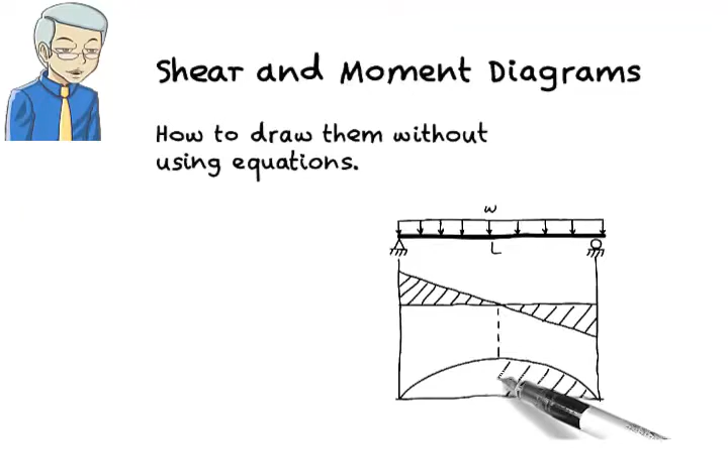Shear and moment diagrams. In this lecture we focus on drawing shear and moment diagrams without the use of any equations. This is particularly useful for practical structural analysis and design. More specifically, we're going to learn how to construct the shear diagram directly from the load diagram, and how to construct the moment diagram from the shear diagram.

Suppose we wish to construct shear and moment diagrams for a simply supported beam subjected to a uniformly distributed load. Observe that the beam has two upward reactions, each having a magnitude of WL over 2.

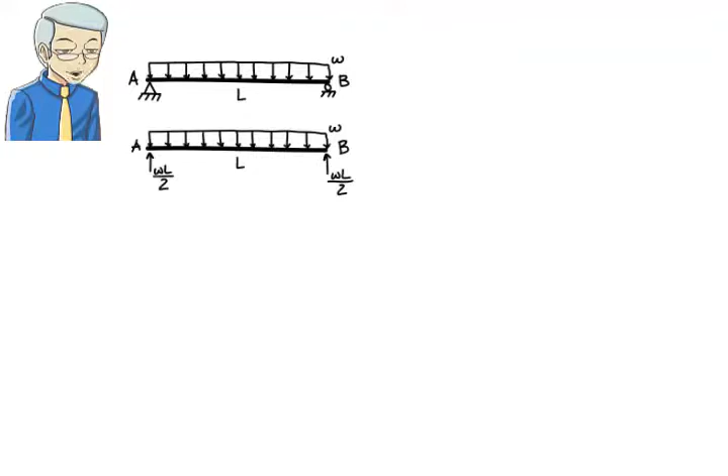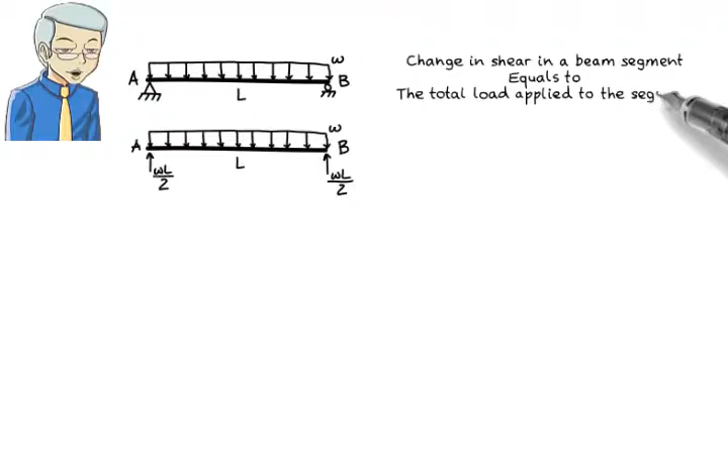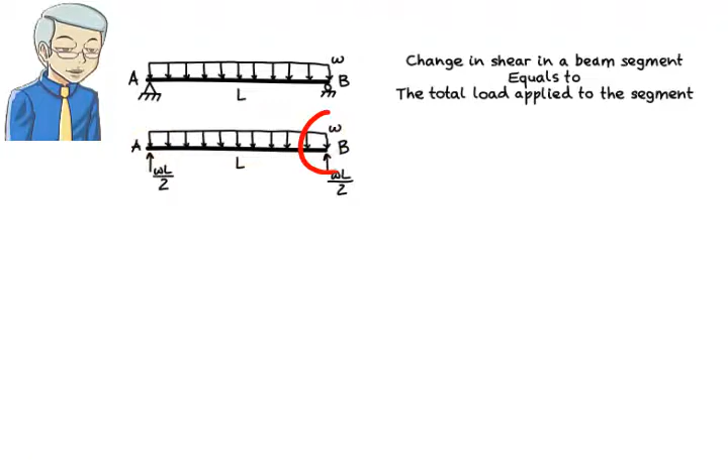The basic fact that enables us to draw the shear diagram directly from the load diagram is this: the change in shear in a beam segment is equal to the total load applied to the segment. So if we know shear at A and we know how much load is being applied to segment AB, then we can easily calculate shear at B. That is, shear at B equals shear at A plus the total load applied to the segment.

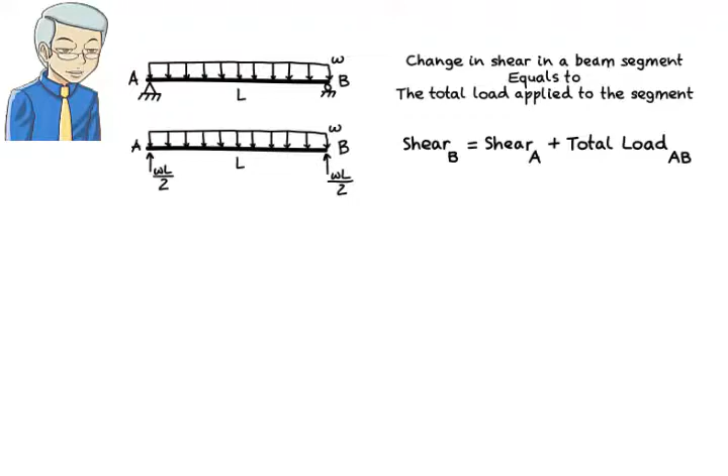The total load applied to the beam segment here is the area of the rectangle having L as its base and W as its height. Therefore, the total load is negative WL. The negative sign indicates that the load is acting downward.

To draw the shear diagram for the beam segment, we need to have three pieces of information: 1. Shear at the left end of the segment. 2. Shear at the right end of the segment, and 3. The shape of the curve that connects the two points.

In the case of a simply supported beam, shear at the left end of the beam always equals the support reaction at that end. Since there is an upward reaction of WL over 2 at the left end of the beam, then shear there is positive WL over 2.

Shear at the right end of the beam segment equals the shear at the left end plus the area under the load diagram between the two points. Therefore, shear at the right end is WL over 2 minus WL, or negative WL over 2.

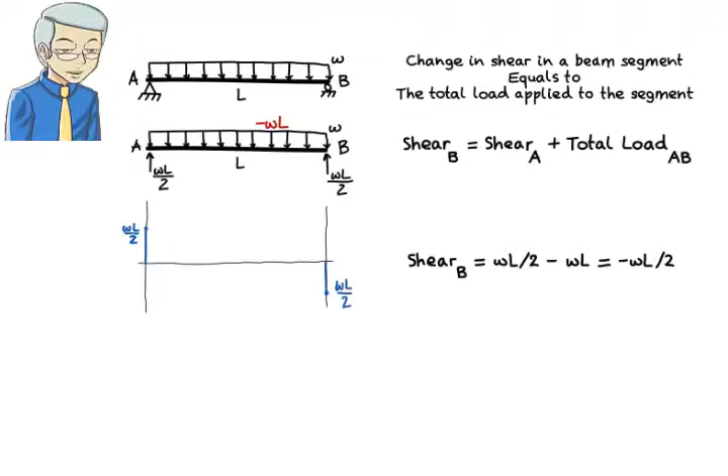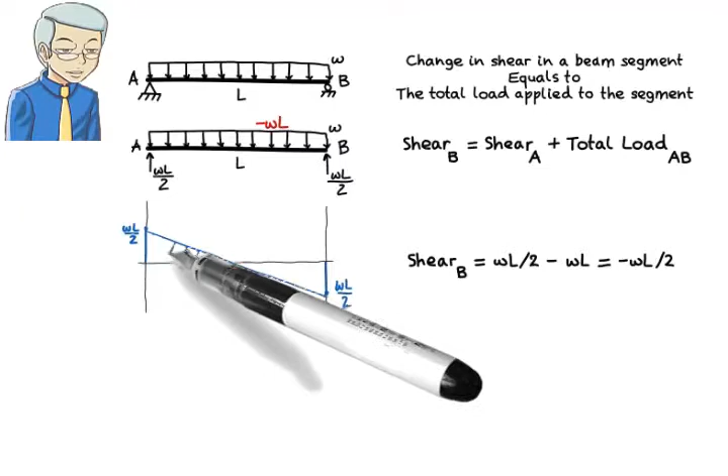Now that we know shear at either end of the segment, we need to draw the curve representing shear within the segment. Since here the load is constant throughout the beam segment, then we draw a straight line connecting the two points. That is, shear is linear in the beam. A beam segment subjected to a uniformly distributed load carries a linearly varying shear.

Concerning the shape of the diagram, the underlying rule is this: if we view the load diagram and the shear diagram as polynomials, then the degree of the shear polynomial is one higher than that of the load polynomial. Since the degree of the load polynomial in this example is 0, the load is constant, then the shear polynomial has a degree of 1. Shear varies linearly in the beam.

Note that the shear diagram consists of a positive region and a negative region, with shear being 0 at the midpoint of the beam. Let's label the positive region R1 and the negative region R2.

We are now in a position to draw the moment diagram using the constructed shear diagram. To do so, we need to calculate the area under the shear diagram. Since the diagram consists of two regions, we need to calculate two areas: a positive area associated with R1 and a negative area associated with R2.

R1 forms a right triangle with a height of WL over 2 and a base of L over 2. Therefore its area is WL squared over 8. R2 has an area equal to WL squared over 8, but this area is negative since the region is below the x-axis. We draw the moment diagram segment by segment.

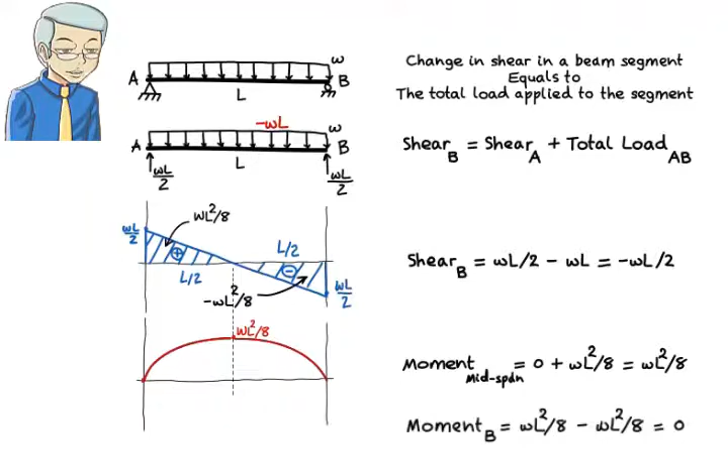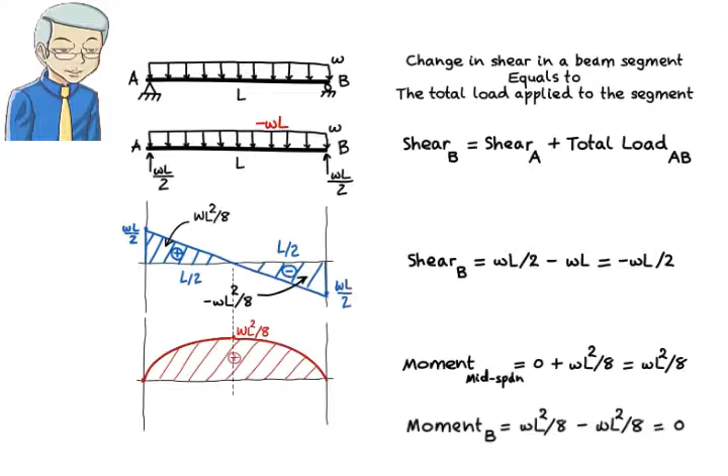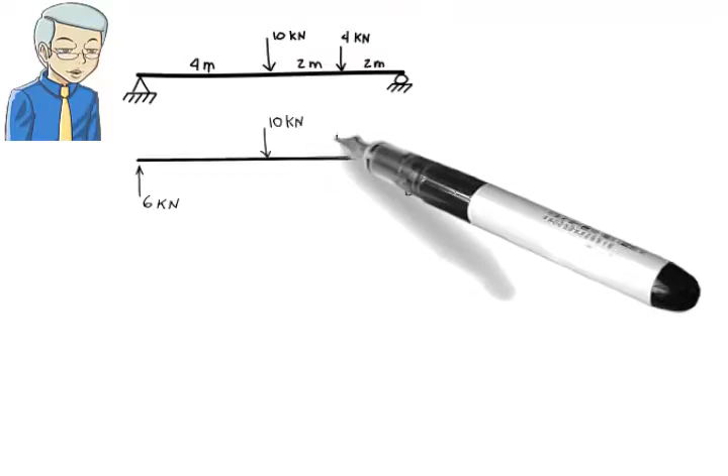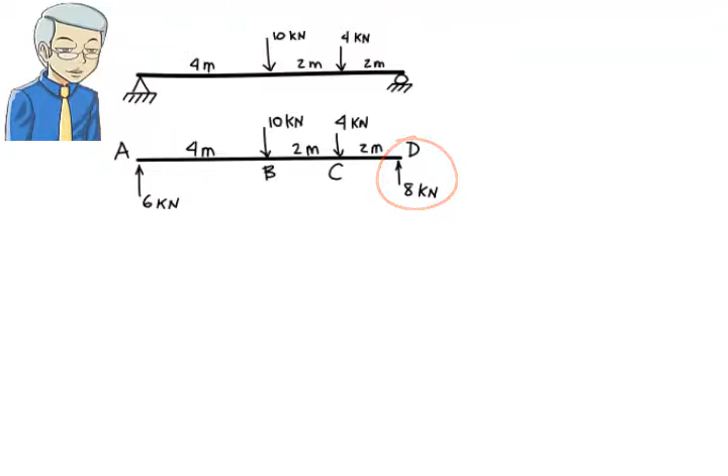Let's look at another example: a simply supported beam subjected to two concentrated loads. We start by calculating the support reactions. The left reaction is 6 kilonewtons and the right reaction is 8 kilonewtons. Note that the concentrated loads divide the beam into 3 segments: AB, BC, and CD.

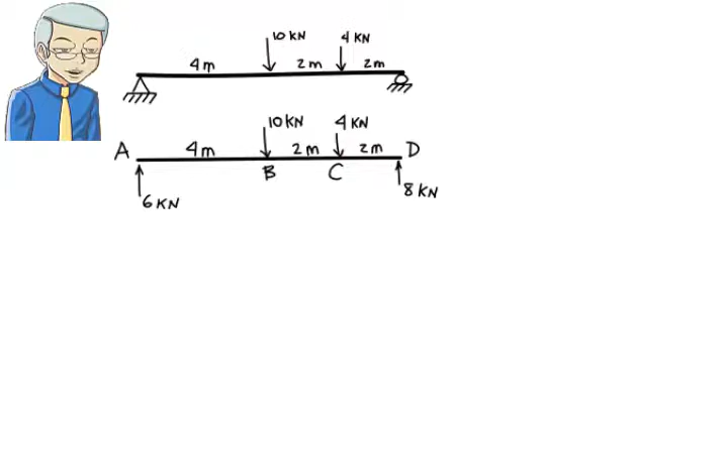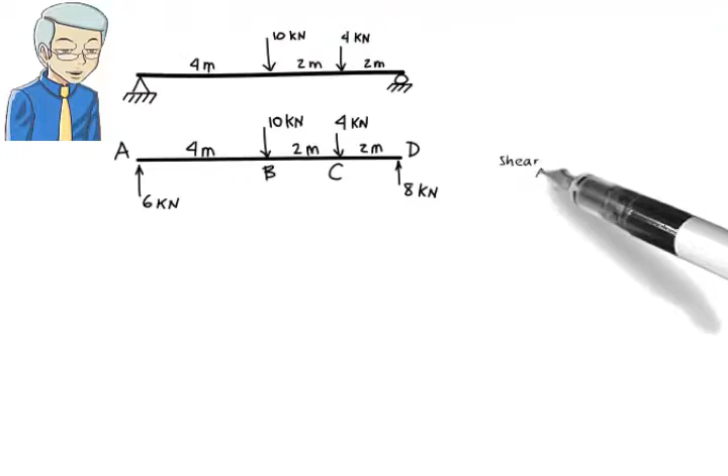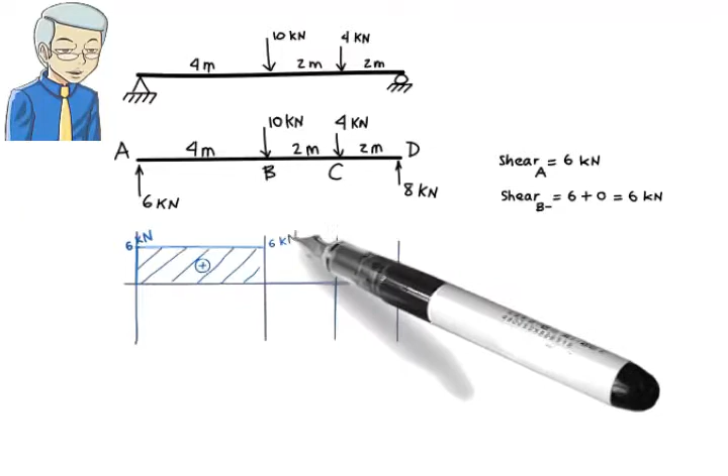We are going to construct the shear diagram segment by segment. For segment AB, because there is an upward reaction of 6 kilonewtons at the left end, shear at that point is positive 6. The area under the load diagram in this segment is 0, since there is no distributed load applied. Therefore shear at the right end equals shear at the left end plus the area under the load diagram within the segment, so shear remains constant at 6 kilonewtons.

At point B, since there is a downward force of 10 kilonewtons, shear drops by 10 units, from positive 6 at the immediate left of B to negative 4 at the immediate right of B. Therefore shear at the left end of segment BC is negative 4. Since there is no load applied within segment BC, the total load is 0, so shear at the right end is negative 4 plus 0, or negative 4. Similar to segment AB, shear remains constant in segment BC.

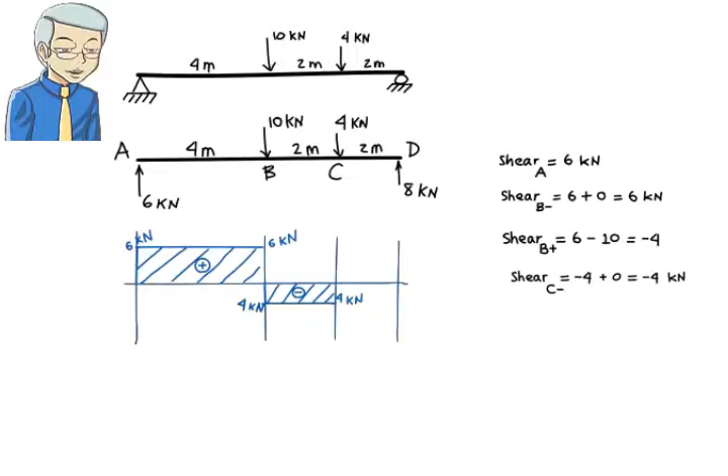Shear just to the left of point C is negative 4. Given the downward force of 4 kilonewtons at C, shear just to the right of the point is negative 4 minus 4, or negative 8 — a drop of 4 in shear value right at point C. Similar to the other two segments, total load applied within segment CD is 0, so shear remains constant at negative 8 throughout the segment.

To draw the moment diagram, let's start by calculating the area under the shear diagram in each segment. The shear area for segment AB is positive 24. For segment BC, the area is negative 8. And for segment CD, the area is negative 16.

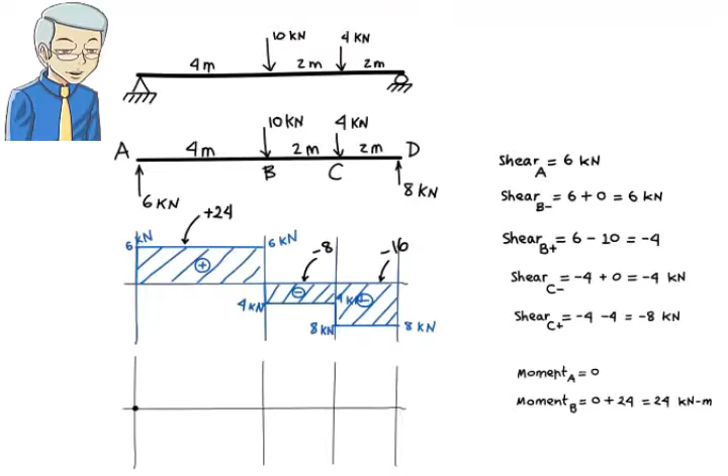For segment AB, moment at the left end is 0, since there is no moment at the pin support at A. The moment at the right end is 0 plus 24, or 24. Since shear is constant in the segment, moment is linear. Why? If we view shear and moment graphs as polynomials, the degree of the moment polynomial should be one higher than that of the shear polynomial. Shear is a polynomial of degree 0, since it does not change within the segment, so moment has to be represented as a polynomial of degree 1 — the equation of a line — meaning moment varies linearly in the segment.

For segment BC, we know the moment at the left end is the same as the moment at the right end of the previous segment, so moment at the left end of BC is positive 24. Moment at the right end of the segment is 24 plus negative 8, or positive 16. Similar to the previous segment, moment in segment BC varies linearly as shown here.

Finally, we can draw the moment diagram for segment CD following the same pattern used for the other segments. Here is the complete moment diagram for the beam.